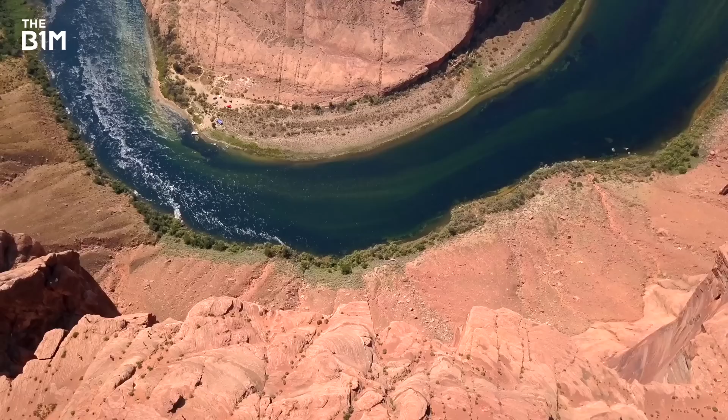It's a resource that none of us can live without, and in many parts of the world, it's becoming scarce. The United Nations is warning today of an approaching global water crisis. A new UN report has revealed the scale of water scarcity across the world.

We are in the midst of an ongoing water crisis, and without intervention, that crisis will only get worse into the future. But while the worst effects are being felt in developing countries, one region known for its prosperity is facing a water crisis of its own.

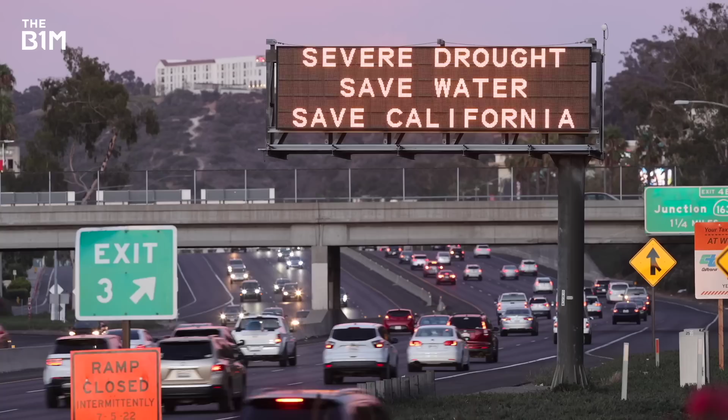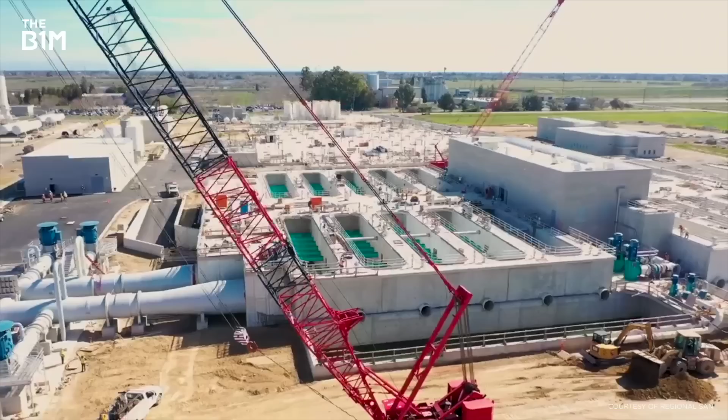California. Part of the solution could lie in megaprojects like this. In 2022, the state recorded one of its driest years ever, part of a multi-year drought. 600 square miles of farmland in Sacramento Valley had to be left fallow, with no crops planted due to low water levels.

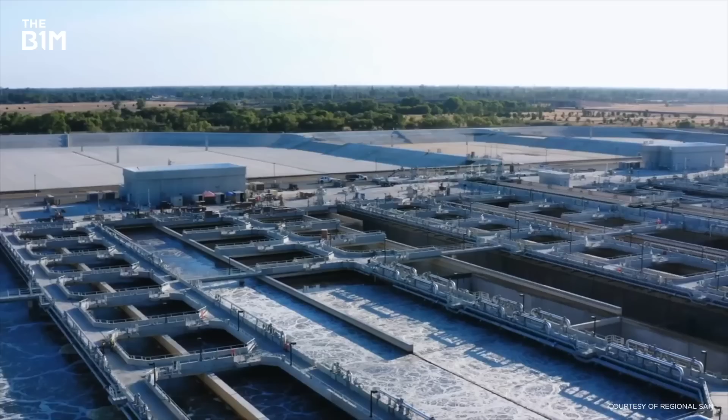But the completion of a massive new water infrastructure project in the city of Sacramento is offering some welcome relief. And it could prove to be a lifeline for one of America's most critical industries, one that supplies more food for the country than any other state. Costing billions and built using cutting-edge tech, this massive megaproject might just have the power to turn the tide.

This is Sacramento, capital of California and the best place to live in the entire state, apparently. Close to spectacular forests and lakes, and just 2 hours from San Francisco, you can see why it's popular. But while everything appears great on the surface of the city, there are some serious issues lying underneath.

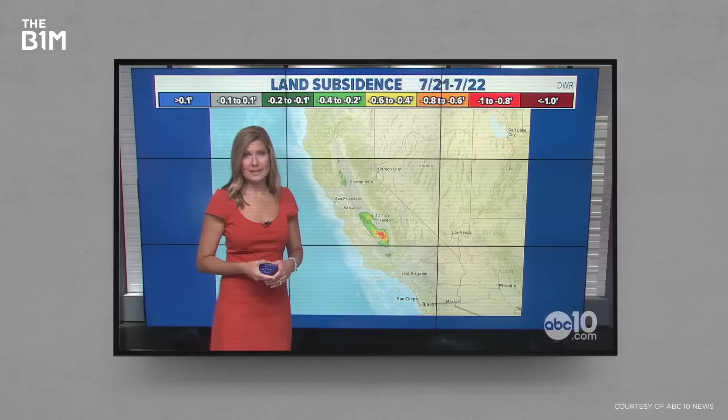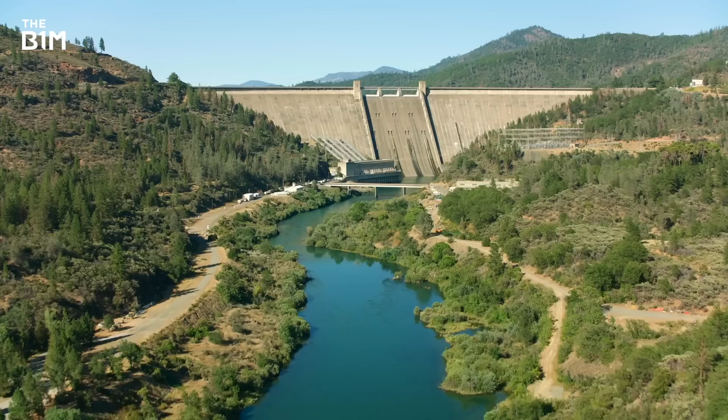Sacramento Valley is now starting to sink. This is called land subsidence, and we've been seeing this for years throughout the San Joaquin Valley. Yes, the very land it sits on has been sinking for years, in a region that's just come through one of the worst droughts in its history.

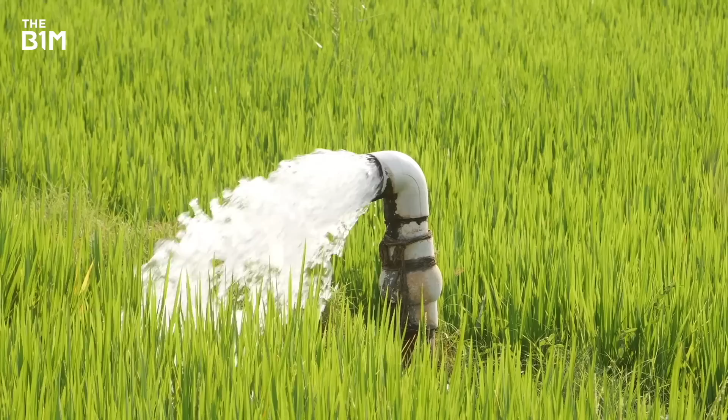So, what's causing this? Well, take a look at where it's located, next to the Sacramento River, the largest in California. When this isn't flowing properly, like in recent times, many farmers are left with no choice but to start pumping groundwater to irrigate their crops. And yet, even this source is starting to run out, and removing all that water from the ground is causing

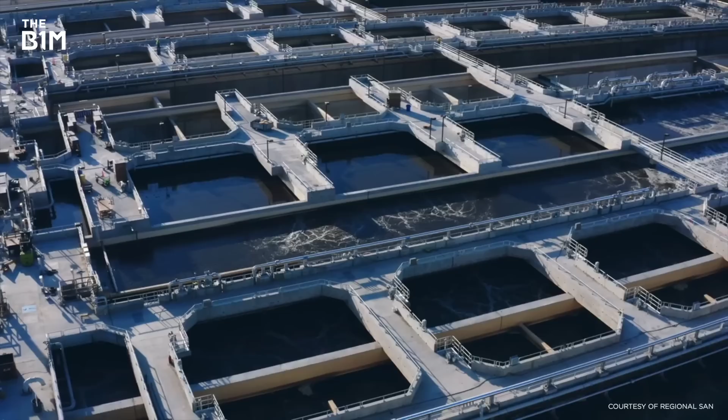the land to subside. Although there's no single solution, one nearby megaproject is transforming the way water is reused across the state, including by farmers. And the impact of that could be huge.

Since 1982, the 1.6 million people that live in and around Sacramento have relied on this. If you don't recognise this type of infrastructure, then just know that it does a job that we prefer not to think about. But without it, things would get very messy very quickly.

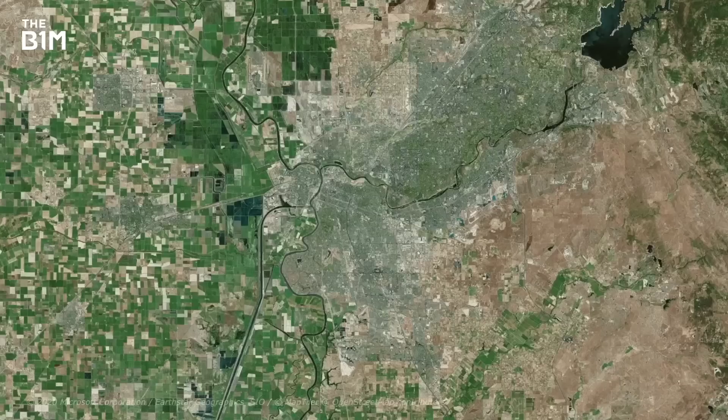It's called the Sacramento Regional Wastewater Treatment Plant. Yes, this is where 135 million gallons of wastewater from sewers and industries in the area is treated every single day before it's discharged into the Sacramento River. That water then flows into the California Delta, where it either becomes groundwater or ends up in San Francisco Bay.

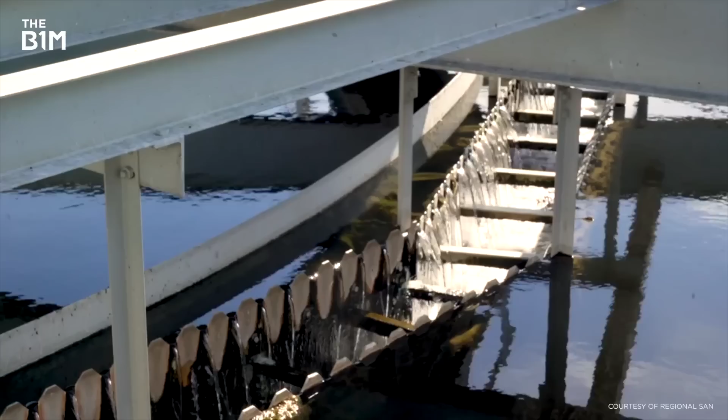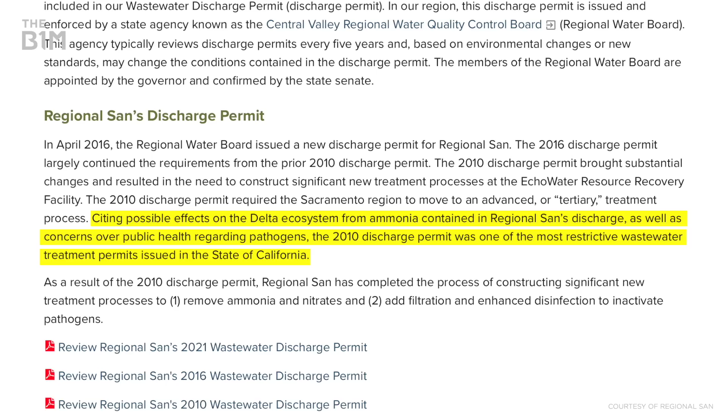This plant quietly went about its business for almost 30 years, but then in 2010, everything changed. A permit was issued by the local regulator in charge of water quality that placed heavy restrictions on the amount of ammonia and nitrates allowed in the treated water. Because this facility wasn't filtering out enough of these harmful chemicals under the new rules, it would have to undergo

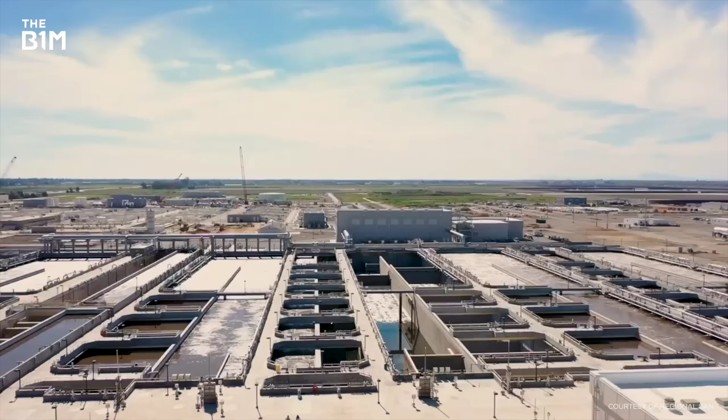significant enhancements. Fast forward to today, more than a decade and $1.7 billion later, and a huge program of work to make this critical infrastructure compliant has just finished.

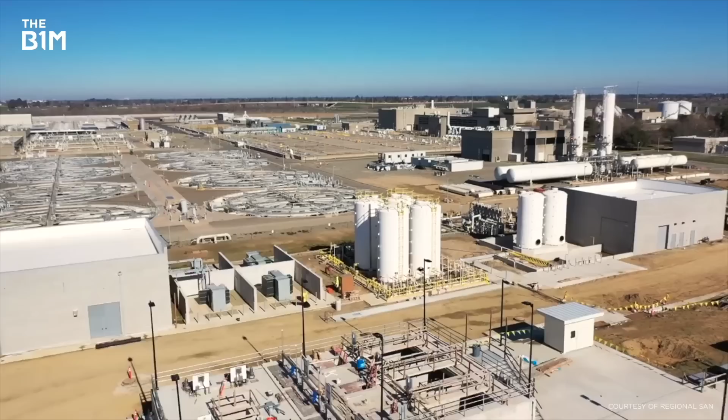Called the EchoWater project, it consisted of multiple individual upgrades across this massive site, which is owned and operated by Regional San. And there were 22 separate projects, all supporting or enhancing the process to make it more reliable and more efficient. Essentially, we touched every part of the plant, from our communications, electrical, chemical, water systems.

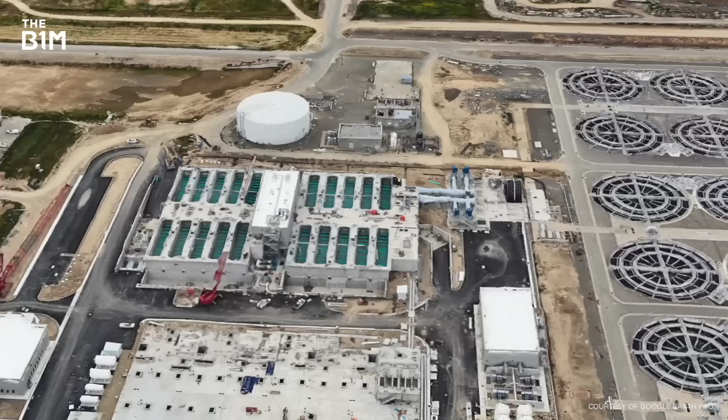We're touching everything. Overall, it took more than 40,000 tons of steel and 170,000 cubic meters of concrete to construct. A lot of that went towards the tertiary treatment facilities where disinfection and much of the filtration takes place. It's made up of over a dozen concrete structures, pumping stations, electrical installations, and more.

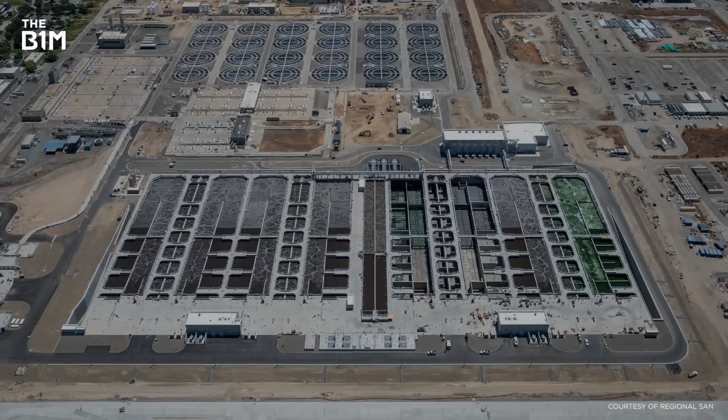But at the centre of the plant, now the second largest of its kind in the US, is the BNR. That stands for the Biological Nutrient Removal Facility. It consists of 8 giant basins filled with special tubes which release oxygen into the wastewater, allowing bacteria to form. The bacteria's task is to remove organic matter, 99% of the ammonia, and 89% of nitrogen from the water.

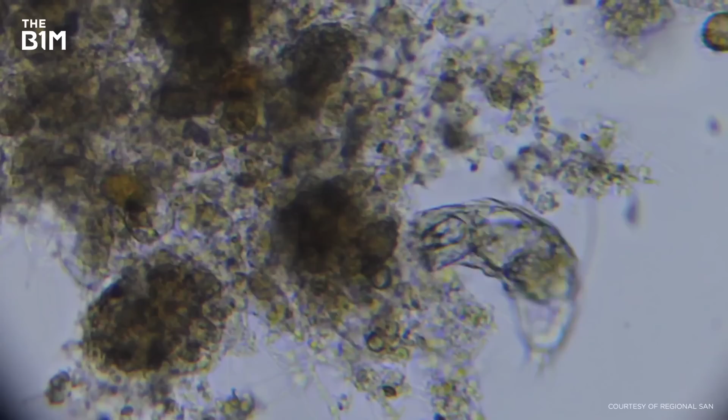That all means that the treated water that comes out the other end now meets those requirements set back in 2010. But how does the wider system work, I hear you cry? Well, here's a very basic, zoomed-out summary.

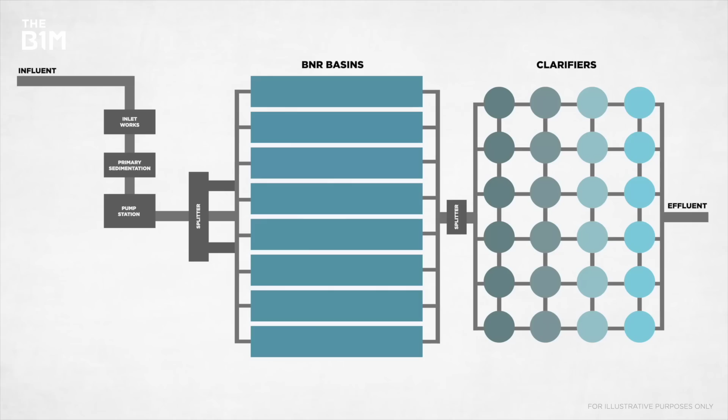First, the unprocessed wastewater comes into the inlet works and primary sedimentation tanks. It's where larger pieces of organic matter and small grit particles are removed and the sludge and scum are filtered out.

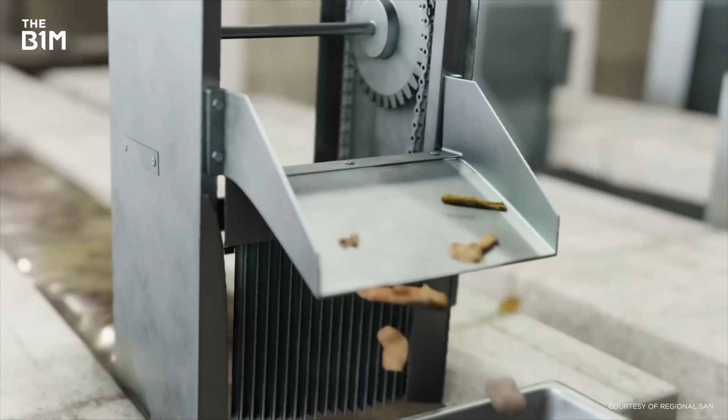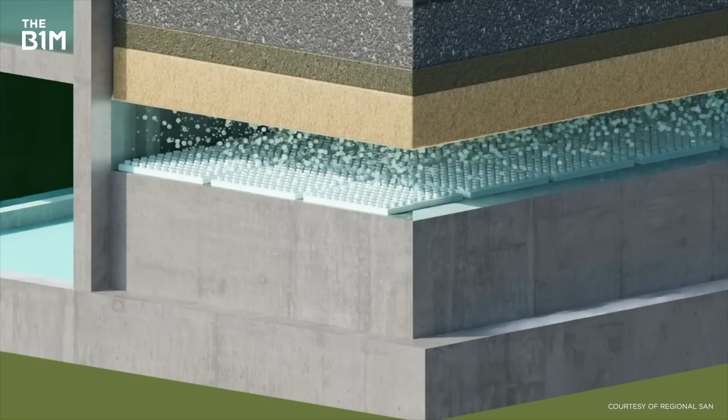Then it enters the BNR where the bacteria do their thing. After that, it moves on to these enormous tanks called clarifiers where the bacteria are taken out. Next, the water is filtered one more time before it's disinfected with chlorine and then neutralised.

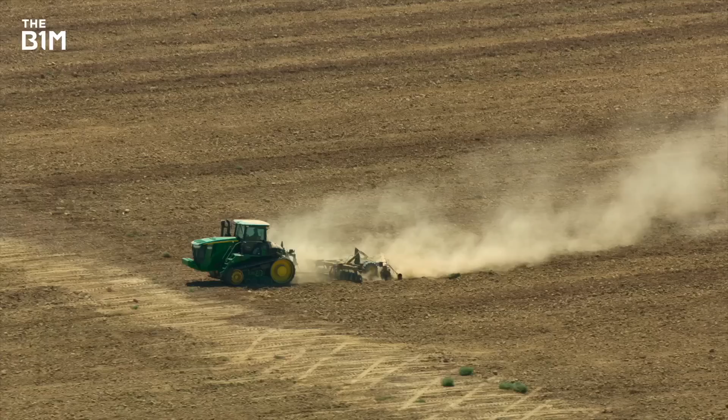And that's pretty much it. The water is now ready to be introduced to the river and it's safer for the environment than before. And soon those farmers are going to be benefiting in a big way, but more on that in a bit.

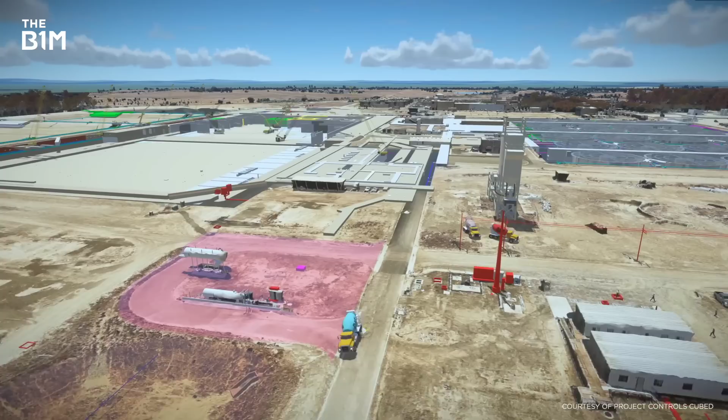The construction of this project began back in 2015 and took 7 years, with several projects happening at the same time across a site that had to remain operational throughout the project. The planning and management of the build was incredibly complex. For what we were trying to do, it was very compressed.

And so with the 22 projects, there was overlapping design and construction projects through the life of the program. We had to pay very, very close attention, working closely with our operations staff on all the various tie-ins to the processes to make sure that we can continue operations.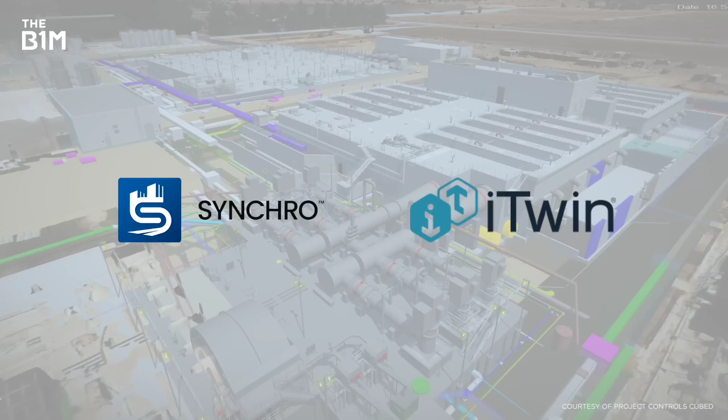Vic and his team had to find a way to prepare for all the necessary shutdowns. They also knew they would need some kind of technology to help them plan the many huge construction sequences. The solution was this, a digital twin of the facility created using Synchro and iTwin software from today's video sponsor, Bentley Systems.

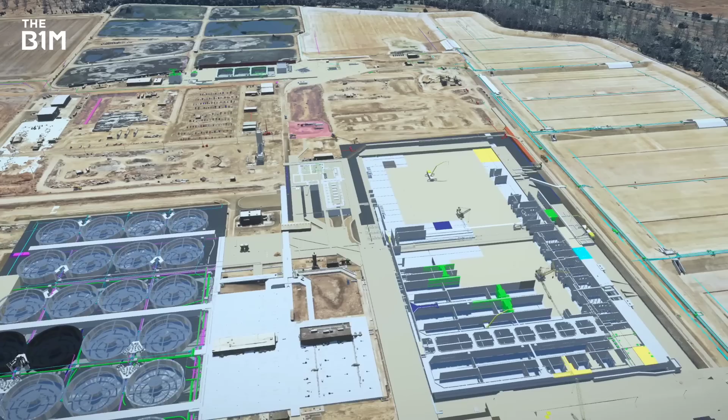We had a very strict concrete pour requirement on this project where you really could not pour back adjacent pours because it was going to expand, and these were water holding structures, massive 18 football fields water holding structures. So we really couldn't afford a lot of leaks. And just trying to schedule or plan those sequences is, in our opinions, impossible without the use of the digital twin.

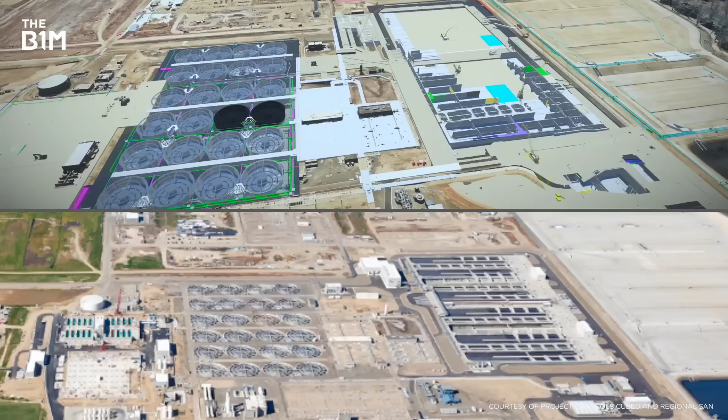Designed and supplied by Project Controls Cubed, a local digital construction specialist, the digital twin is a complete virtual replica fully synced with every aspect of the physical site and its many components. People right across the project team, from designers to contractors, could use the digital twin to prepare for and carry out all the tasks that had to be done, identifying problems in advance and working in real time.

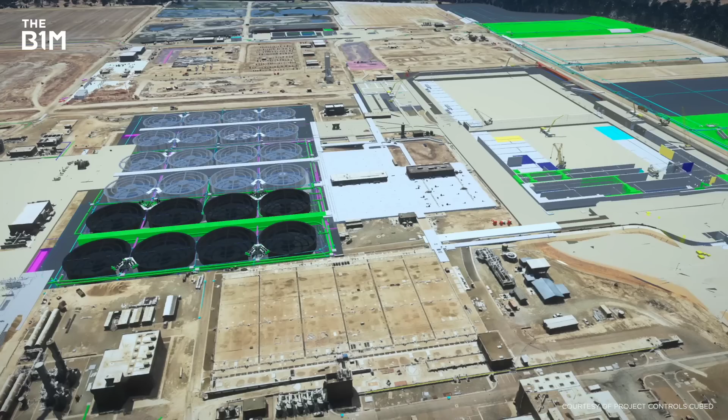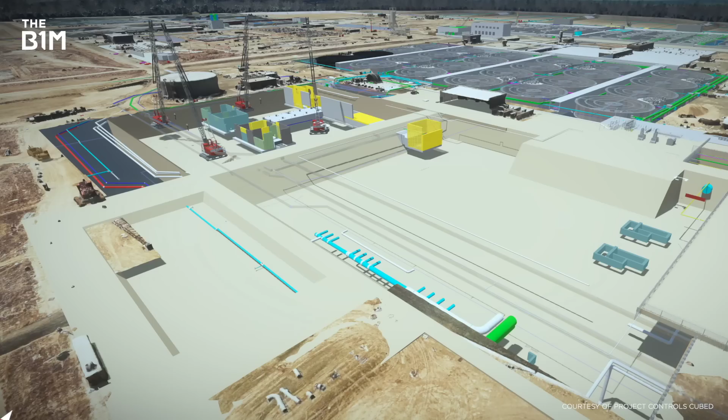Can you imagine being able to manage a project, almost 100,000 activities? How can you manage that, right? The digital twin really gave us that platform that we were able to quickly catch an error just like that. Anybody can see it, right? Anyone, the designer, ourselves, in a matter of seconds, you can catch it. What we did is we put situational awareness in front of these amazingly brilliant people, which allowed them to make time-sensitive decisions that were proactive instead of reactive.

With the digital twin, it was possible to take regular 3D models and integrate them into a 5D environment. What the digital twin does, it elevates it and takes it a whole nother level. You're taking your 3D object, your static object, and you're tying it to a scheduled activity. Not only that, but you can study the cost, the budget, right?

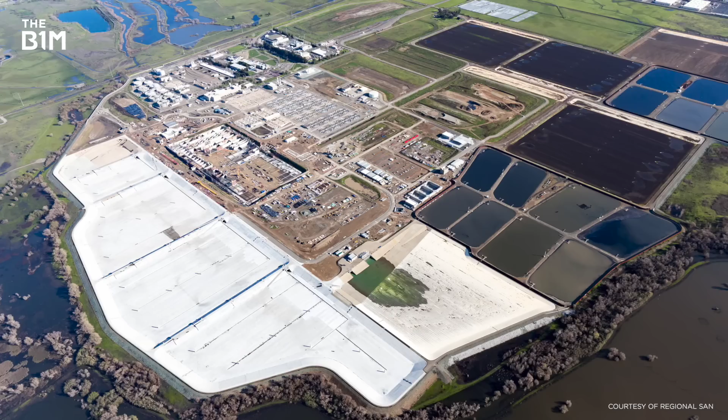Keeping costs down was essential, and not just because the project was part funded by Sacramento area customers, whose bills went up to help pay for the works. Coming in under budget could allow the excess cash to be spent on other upgrades, and that's exactly what happened, to the tune of $400 million. Yes, you heard that right, a massive public infrastructure scheme that actually cost less than it was supposed to.

Now, the leftover money is being used to fund the next step, one of the largest agricultural reuse projects in the US. Regional SAN is building a new pump station and pipelines that are going to direct the cleaner water from the upgraded plant all the way down to southern Sacramento County.

Up to 16,000 acres of land used for agriculture and habitat conservation will be irrigated with this new supply, with the first phase due to complete in 2025. That'll mean a lot less groundwater pumping, allowing levels to recover, along with more sustainable farming. In a region that's desperate for a new water source after years of lost farmland and falling crop revenues, that's finally some good news.

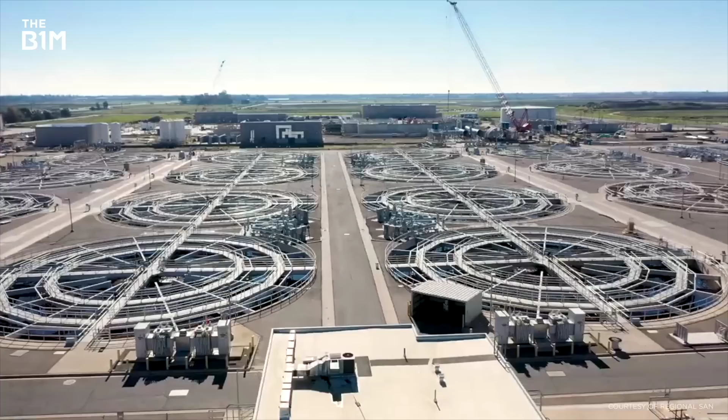A water treatment facility might not sound like a very big deal or a very interesting project, but it's the kind of infrastructure that's as critical to keeping our world running as any other, and they don't come much more important than this one. With droughts and shortages likely to become more common in the future, the city of Sacramento at least might be about to see one of its biggest problems washed away.